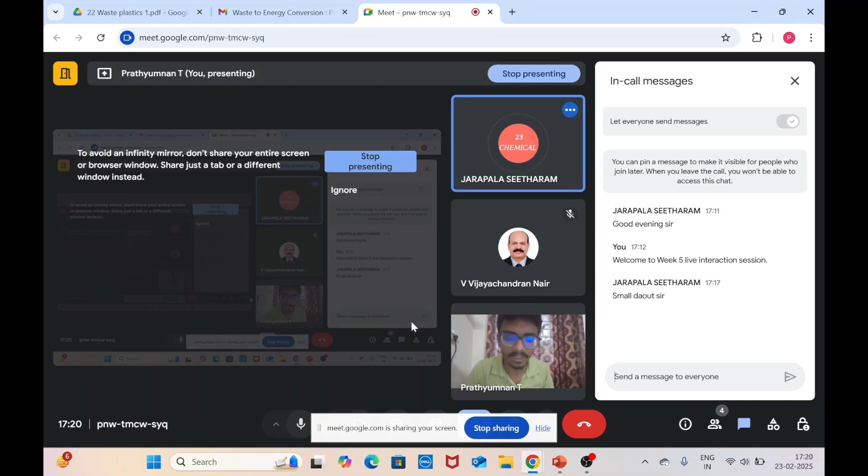I was asking about the different types of losses, or sorry, how do you define the thermal efficiency of a power plant, or what is the expression for the thermal efficiency?

Yeah, so basically, as such, if you see efficiency, it is something like output by input. So here, since we deal with thermal efficiency, we talk about the work as well as the heat input. So yeah, that's correct.

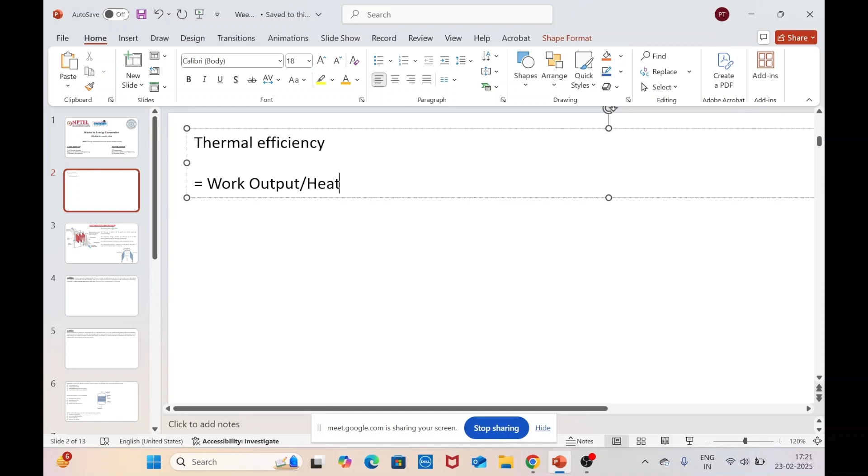If you want to elaborate this expression, it can be written as energy generation rate times T. This is how it is defined in the course module, so I'm going to follow it exactly the same: energy generation times T, by mass, times C, that is your heat capacity, specific heat capacity, the entire times 100.

So this is about the thermal efficiency, and if you talk about the overall efficiency of the process, then you have to incorporate the efficiency of every single component in the system, that is your boiler efficiency, turbine efficiency, generator efficiency, work efficiency, and all the stuff. So here is what comes.

Since the entire process of the power plant has multiple steps, each step will incur some sort of losses. So let us list down all the losses, because they form a major portion of module 2, relating to the efficiency of the power plant. So, different types of losses.

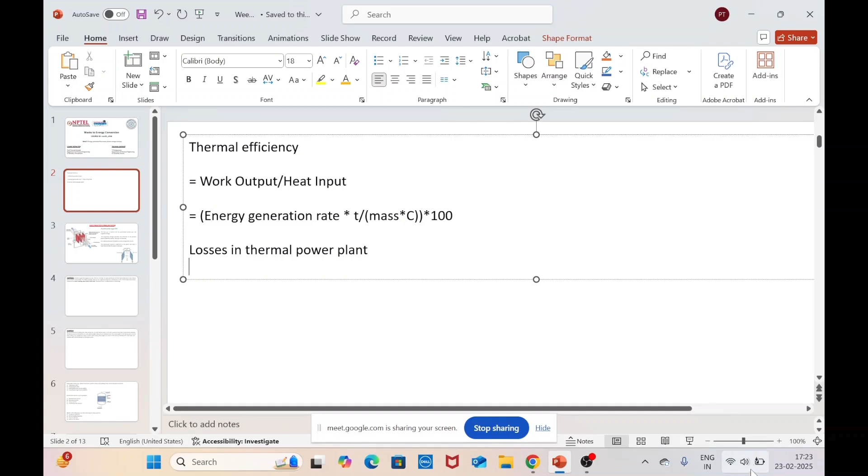Yes, you are unable to see my screen. Okay, just—

Yeah, yeah, you can see that losses in the thermal power plant, right? That heading.

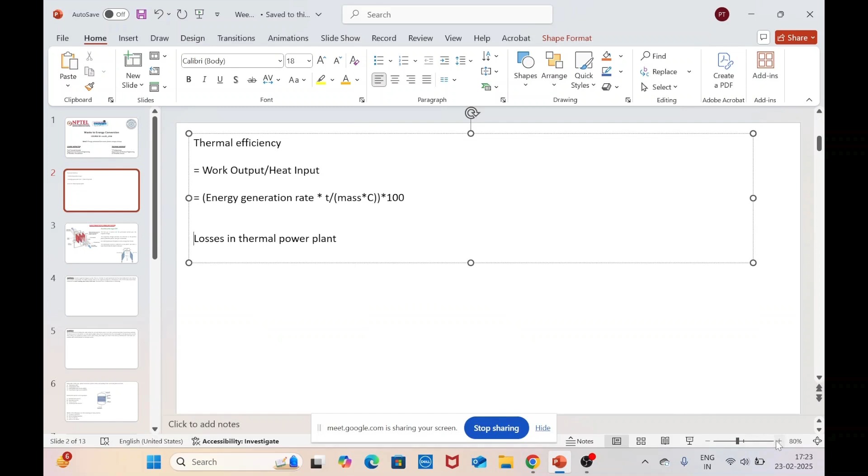Is it okay right now? Okay, so that's fine. Again, as I said, the weather is not so good, so probably there might be some internet issues.

So, losses in the thermal power plant. Can anyone list what kind of losses in thermal power plants—I mean, what kind of losses do you expect while calculating the efficiency as such in a power plant?

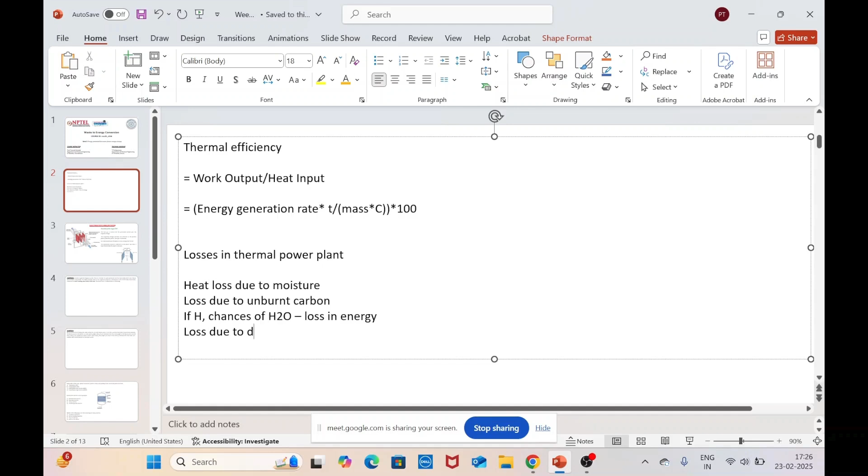Then loss due to dry exhaust gas. Another one is the loss due to incomplete combustion. What happens is, if enough oxygen is not supplied, carbon will not get converted to carbon dioxide, but rather to carbon monoxide. That is an incomplete combustion process, because of which there might be some losses happening within the system.

And another most common loss that happens is the energy loss due to convection and radiation.

After that, due to the presence of the formation of slag or ash, they will try to take up the amount of heat. This is a common problem within boilers, not just industrial boilers but even at home. The slag, or thick layer that forms at the bottom of these boilers, will prevent heating efficiency, so the system will not heat up properly because of this slag formation—they act like a heat insulator and decrease the efficiency of the process.

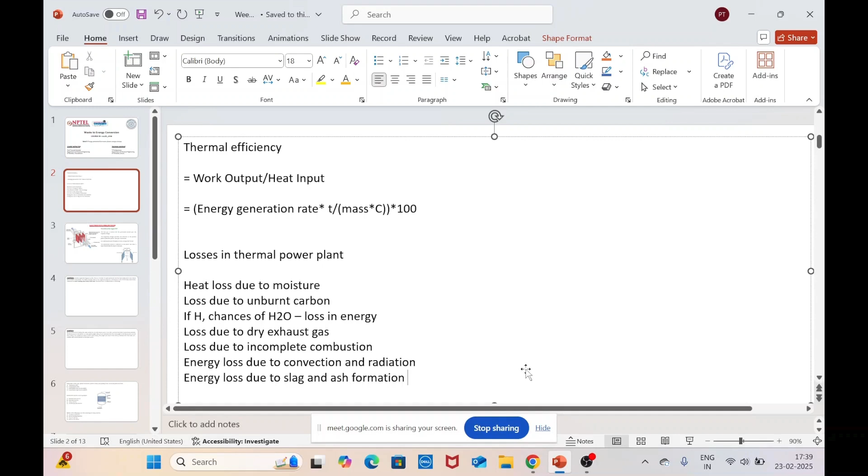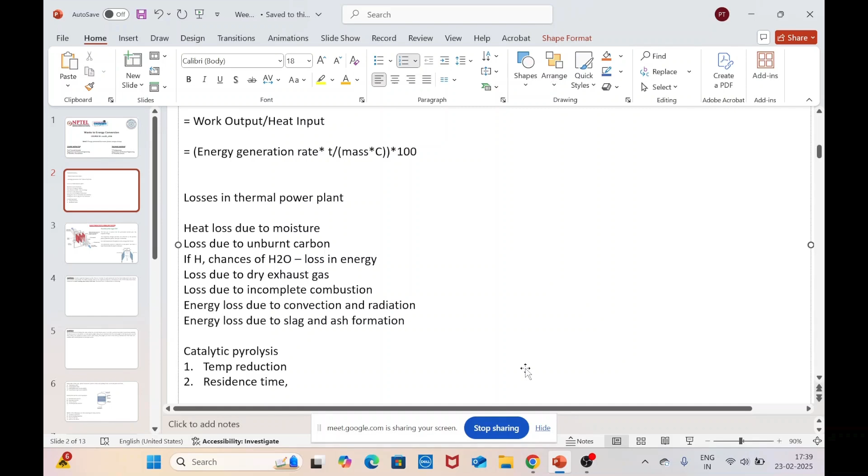Let me write it down. First one is temperature reduction. Second one is residence time, or in a layman sense, the amount of time required for conversion of waste to fuel. Then the yield. Then the quality gets improved - the liquid fuel quality will be improved if you use this catalytic process. Yes, all are right.

If you use catalytic pyrolysis, you use a catalyst, which will tend to decrease the temperature. Instead of this process happening at 1000, 1200, or 1400 degrees Celsius, using the catalyst you can reduce the temperature to 800 or 900 degrees Celsius. So the catalyst helps in temperature reduction. This is beneficial because reaching that higher temperature requires a lot of input fuel. By using a catalyst, you significantly reduce the amount of fuel invested in the conversion process. Residence time is lowered, yield is good - better quality product, and more product obtained at the end.

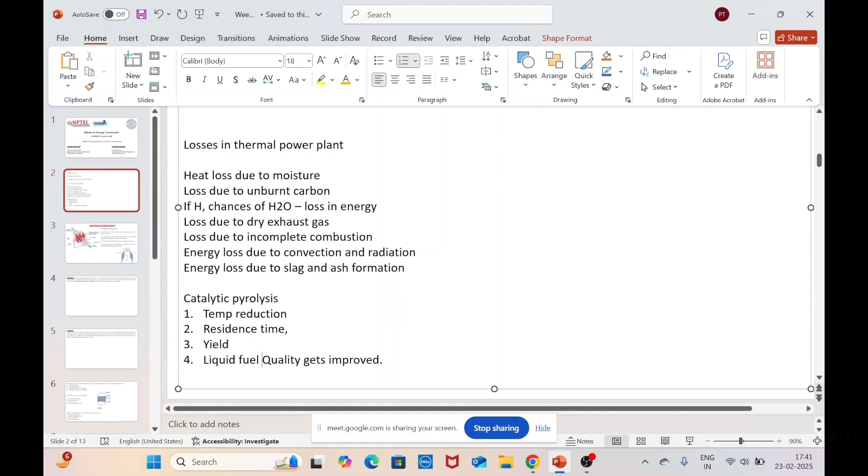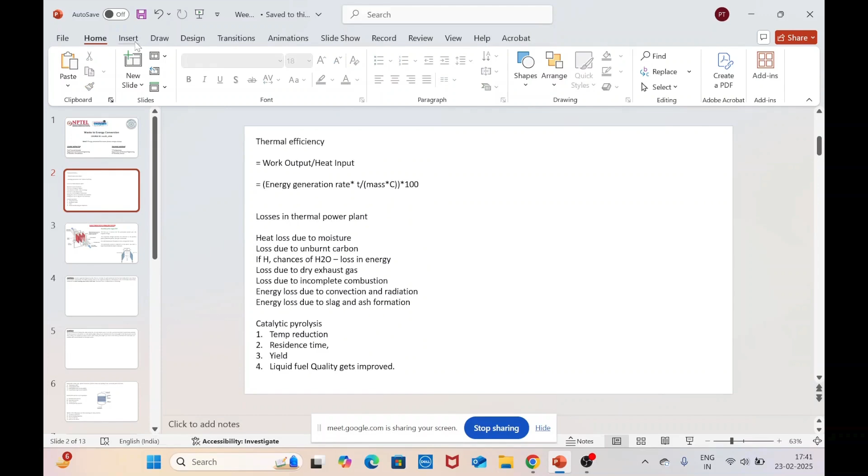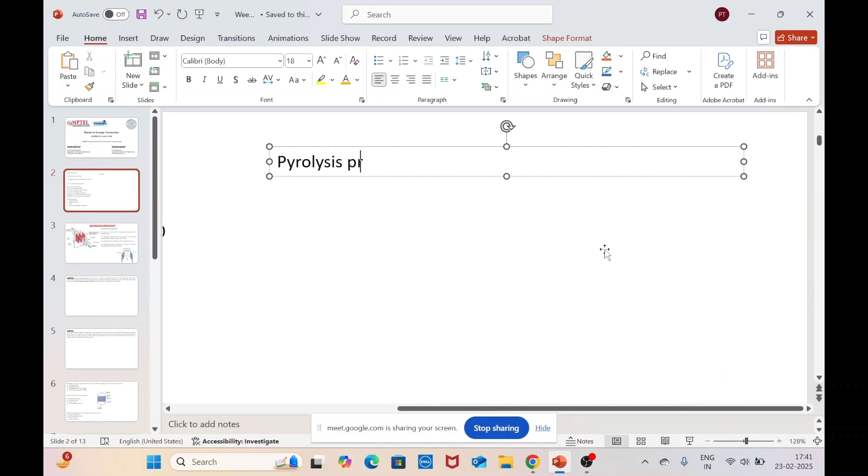So this pyrolysis process depends upon quite a few parameters. Catalytic pyrolysis process depends on multiple factors. Instead of me telling you, I'd like to get responses from you. What parameters do you think can affect this pyrolysis process?

This is like an exercise, because when you talk about a particular process, we should have knowledge on what kind of parameters could affect the process. We should try to develop this understanding on what could affect this particular process - this will help in designing of systems.

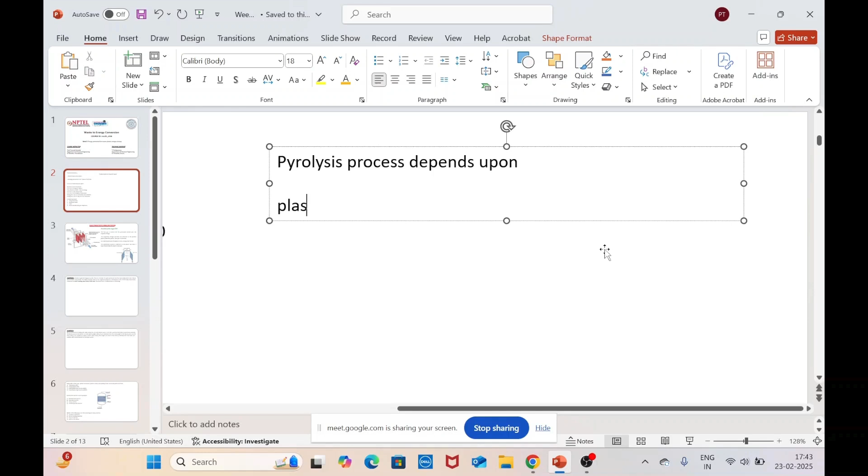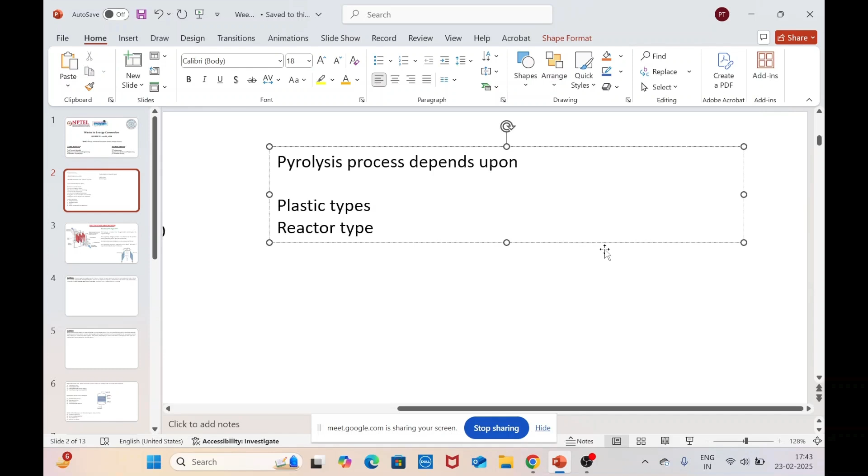Plastic type. And then reactor type - whether it's fixed bed or fluidized bed, or the screw type reactor, packed bed. Then, with respect to the catalytic pyrolysis process also - type of catalyst.

So, amount of catalyst - how much catalyst should be added. If you think from the normal pyrolysis process perspective, you can talk about temperature of the process and residence time.

So yeah, we have almost covered all the process parameters which can affect your pyrolysis process. Types of feedstock - whether the feedstock you're going to use is plastic, and if plastic, what kind? If it is biomass, what kind of biomass, and what are its constituents?

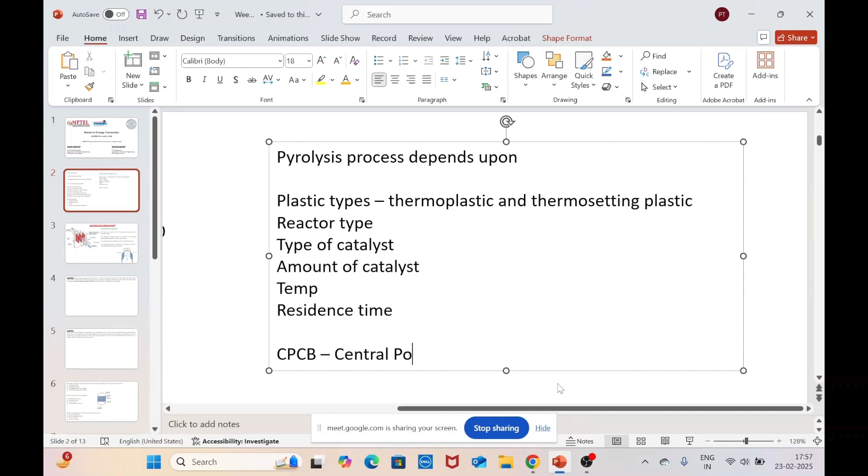Why is there a need for the gas cleanup? So to make sure that the pollutants are less. Last time also we discussed that the particulate matter in the outlet gas should be reduced. So there is a board which is called CPCB, the Central Pollution Control Board. They have some norms, particular rules and regulations.

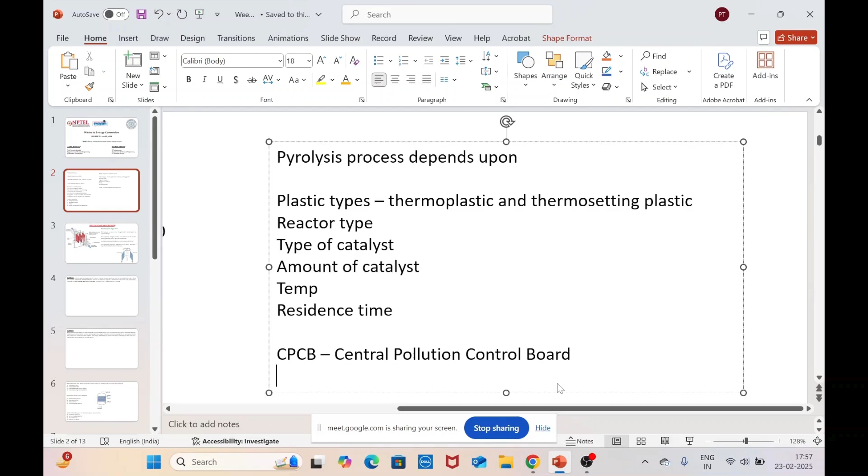So they have some norms wherein you have to remove a certain amount of the gases before you let out these gases in the atmosphere. For this purpose you require an entire system so that the flue gas is cleaned up before it is sent to the environment. So for this process we use multiple different types of equipment. One set is for particulate matter removal alone.

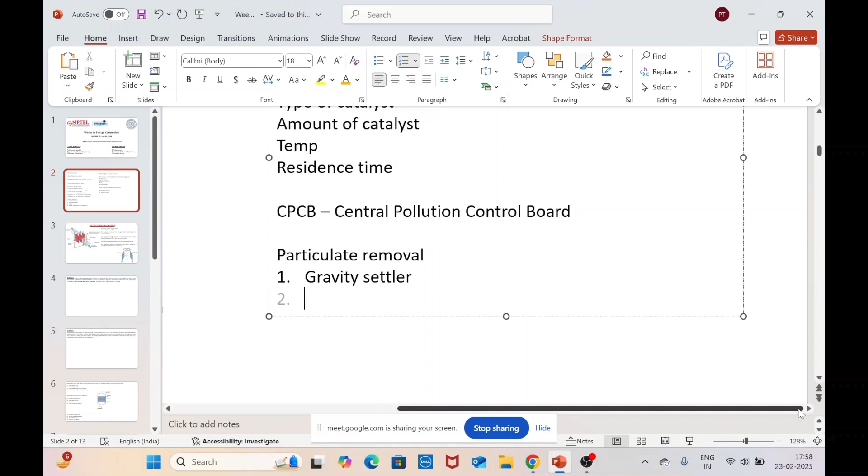You have the gravity settler, wherein you use gravity as the major source of force to make sure that the particles settle down at the bottom. One major disadvantage of the gravity settler is that it cannot separate fine particles. The particle size should be greater than 50 micrometers. However, the gravity settler is a good setup for a pre-cleaning step.

Yes, you mean power generation, steam turbine and gas turbine.

So the gravity settler is a pre-cleaning step for particulate removal, and it is one of the simplest methods you can use. Apart from that, you have ESP, electrostatic precipitator. Third, you have cyclones. The major working principle of the cyclone is that you use centrifugal force to make the particulate matter settle down at the bottom of the setup, through which you can remove it from the system.

After that you have the fabric filter. These are for particulate matter removal. Apart from that, for other gases you do scrubbing, dry scrubbing, wet scrubbing, and also adsorption-based processes. Coming to the gravity settler, you use the movement of the particulate matter in the gas to model the system. You consider the gravitational force, buoyancy force, and drag force, and by balancing this force equation you get the expression for the terminal velocity.

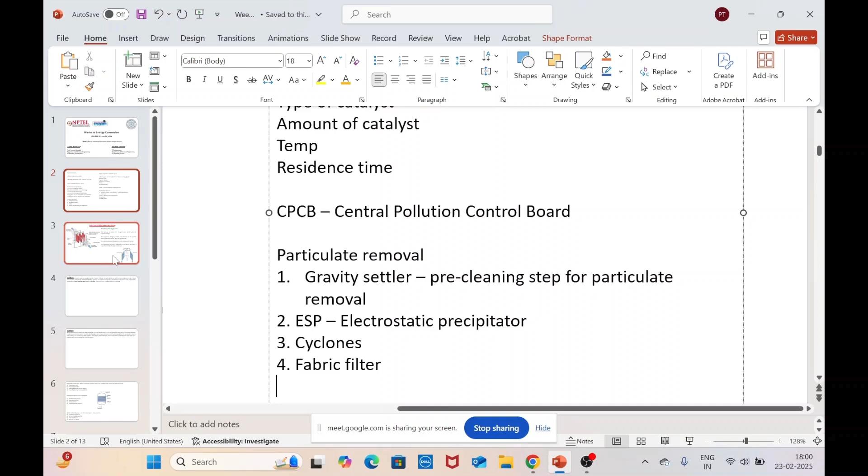The next one is electrostatic precipitators. Let me put it in presentation mode. Here we will discuss parallel plate type electrostatic precipitators. Here is a more complicated three-dimensional diagram, but if you see the bottom right, a parallel plate electrostatic precipitator consists of two plates, and in the space between the two plates you have an electrode. This electrode is connected to the negative terminal, and then the collector plates. This is the discharge electrode.

I hope my pointer is visible. So this is the discharge electrode, the one at the center, and the ones present on either side of the discharge electrode are your collection plates. You connect this discharge electrode to the negative terminal.

When the incoming gas with particulate matter enters in a direction parallel to these plates, due to the high voltage in the discharge electrode, the gas gets ionized. The particulates present in the gas get negatively charged, acquiring the charge of the discharge electrode. Since they have a negative charge and the collector plates are positively charged, they move away from the main gas stream, divert from their direction of motion, and get stuck onto the collector plates.

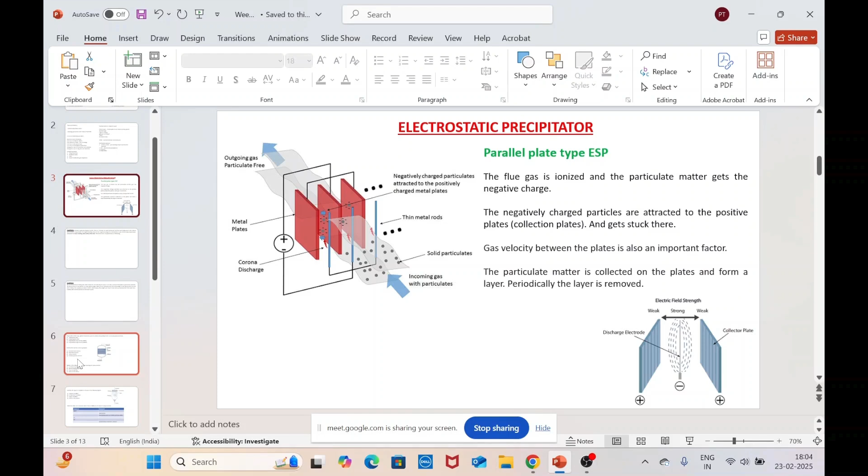So, with this, I think we have come to 1 hour of the session. So we would go towards solving some problems. That is the main focus of this session. So in case you have any doubts, you're welcome to ask me right now.

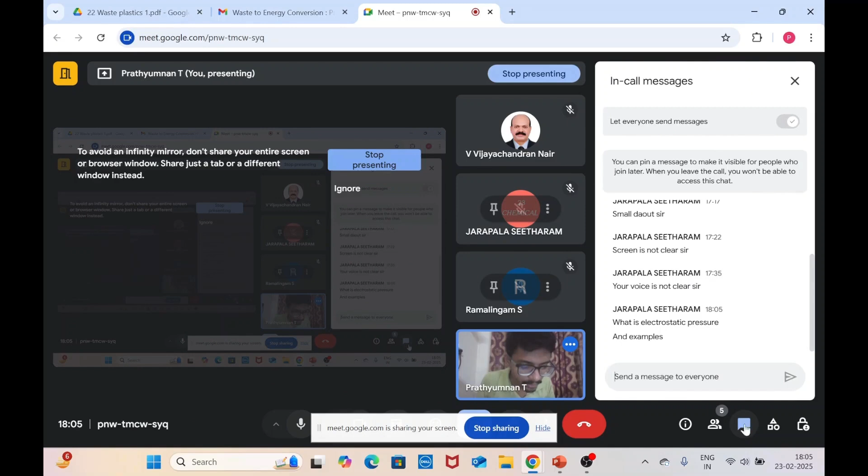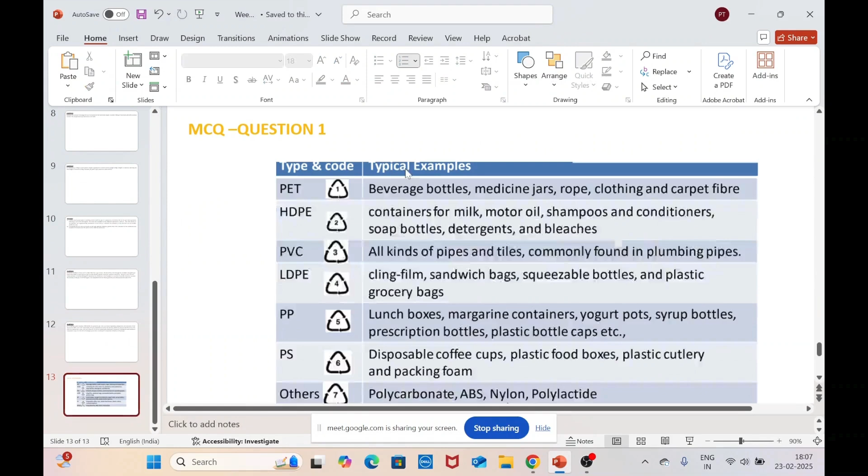I will address that question later. Because we need to know which kind of polymer is used for what. So, disposable coffee cups, plastic food boxes, plastic cutleries, and packing foams come under polystyrene. If you have carpet fiber, clothing, rope, medicine jars, or beverage bottles, they are basically PET. PET in full form is polyethylene terephthalate. Then containers for milk, motor oil, shampoos and conditioner, soap bottles, detergent and bleach come under HDPE.

The major reason why I gave this is because there are chances for this kind of question coming up in the assignment as well as the final exam. So it is good to remember one or two examples of each kind. For example, polypropylene, you have lunch boxes, margarine containers, yogurt pots, syrup bottles, and in case of LDPE, you have squeezable bottles and plastic grocery bags, and PVC, you have pipes and tiles. Pipes is the best example, so many of us will know. So these are some of the examples.

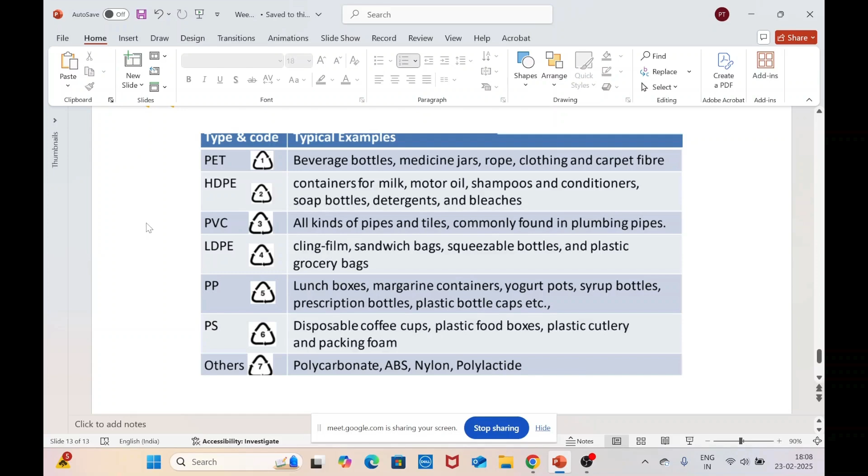Yes, the second one, CH3, CH2. CH3, single bond CH, double bond CH2. Is it okay? Again, we have one question for that, so let's come to that. So the first question is polystyrene. The second one, as somebody rightly said, it's a fixed bed reactor. So I'm just going to mark that as fixed bed.

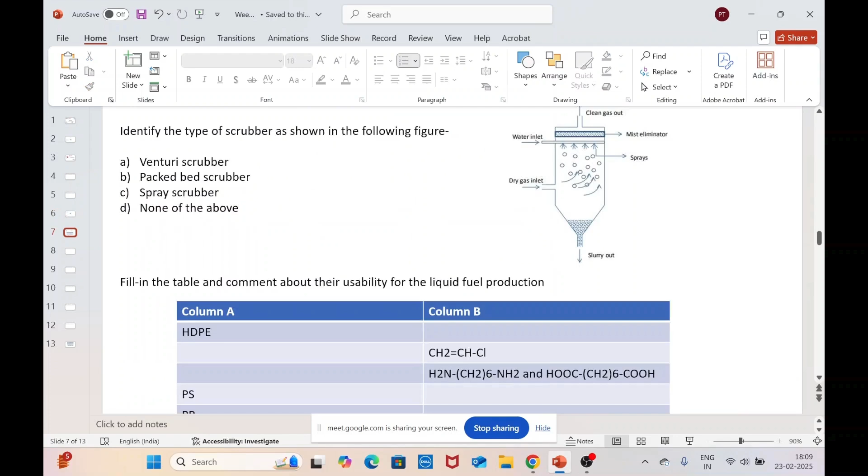Somebody was asking what a fixed bed reactor is or how it looks. I think they will be able to understand this. Then, somebody asked about this polymer, right? So let's fill up the table before we move to the previous two questions. You have to fill in the table and comment about their usability for liquid fuel production. Column A is for polymer and column B is going to be for monomer.

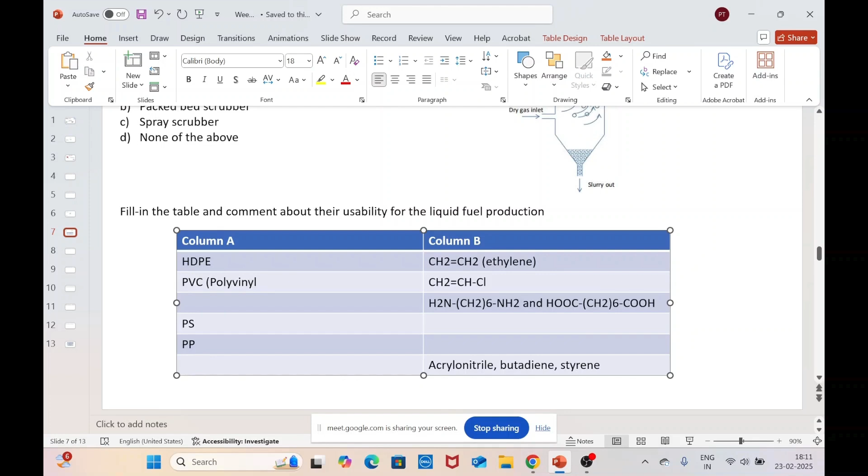So what will be the monomer for HDPE, high density polyethylene? Yeah, CH2 double bond CH2, ethylene. And the monomer is CH2 double bond CHCl, so what should be the polymer? Polyvinyl chloride. And the third one, nylon 66. This compound name is hexamethylene diamine, and this is adipic acid.

So just a very basic question, why do we call it nylon 66? Yeah, each of the monomers has six carbons in their structure. That number is 6, so that's the reason it is named nylon 66. There is something also called nylon 6. PS is polystyrene. So the monomer is styrene. C6H5. Polypropylene. Somebody said propylene. Yes.

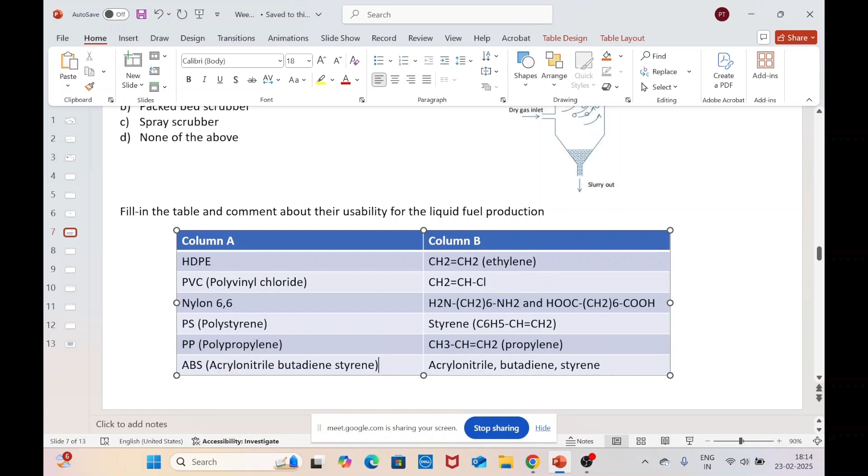So the last one, ABS, butadiene styrene. Acrylonitrile, butadiene, styrene. So yeah, yes. Yeah, it's actually a sort of a rubber. So it's a very, yes,

3D printing. So you can use PLA, polylactic acid, or you can use polyurethane also. Because when you say 3D printing, there are multiple types of 3D printing systems available. So polylactic acid and polyurethane can be used for this 3D printing purpose. Specifically for filament-based 3D printing, both of them will be suitable because they can be blended in the form of fiber wires.

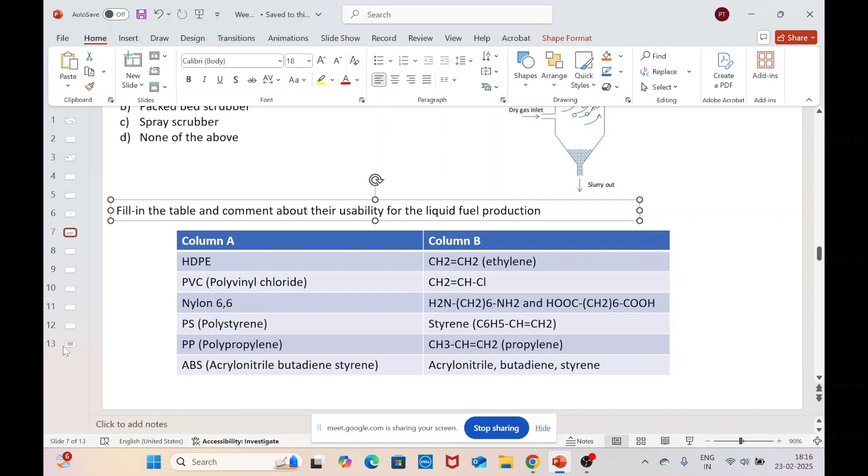So, yes. So, the basis of differentiation is based on their molecular weight, and the second one is based on their density. As the name suggests, high density polyethylene is denser, and low density polyethylene is less dense. And in case of their molecular weight, high density polyethylene has relatively more molecular weight compared to low density polyethylene. So that is the reason there is a change in the application also.

If you see low density polyethylene, you can easily come to know they are all in the form of bags. But high density polyethylene is mostly in the form of containers. So the mechanical properties of high density polyethylene are more compared to low density polyethylene. But the basis of differentiation will be their molecular weight and density. Is that okay? Yeah, containers for milk, motor oil, shampoos, conditioners, soap bottles, detergent and bleaches.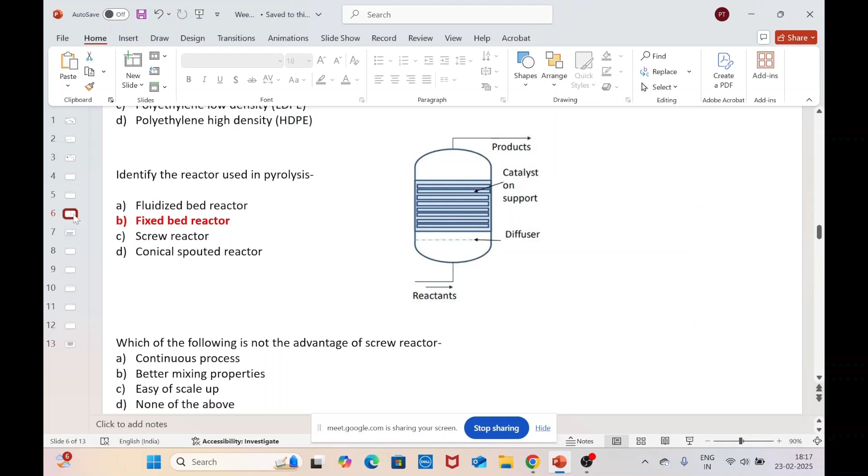And then let's come to this numerical. This is a question I was discussing previously also: how much energy will be lost? We were talking about energy losses. So you have to calculate the amount of energy lost due to the moisture in the feedstock sample. Consider the feedstock to be 100 kg and the moisture content to be 30 percent, and Tg, the outlet or exhaust temperature, is 130 degrees Celsius. Calculate the energy lost in kilojoule per kg.

I hope the equation is known to everyone, or shall I write it? Let me write the equation. Q loss due to moisture is M, your moisture content, times 4.187 times 100 minus TA, the ambient temperature, plus 2256.8, the latent heat. So this is correct, right? And then you have the specific heat of steam as 2.09 times Tg minus 100. Kilojoule per kg. TA is the ambient temperature; you can take it as 25 degrees Celsius.

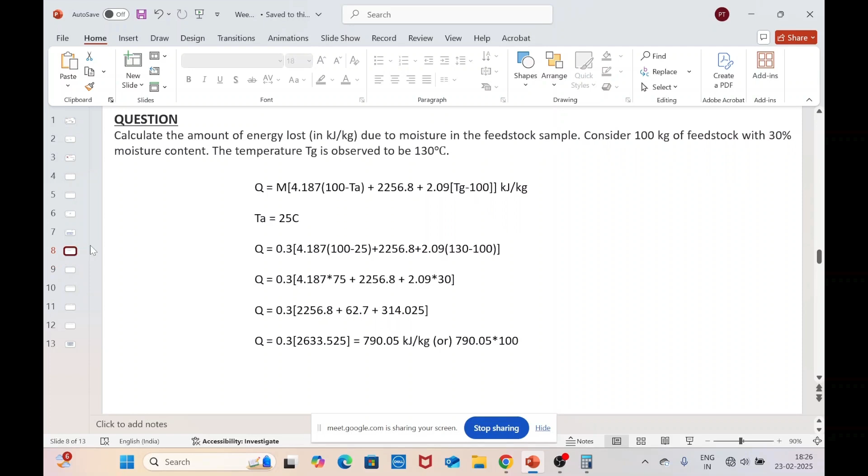So we have 2.09 times 30, 62.7. If you add all this, 790.05. If the question asked the absolute value in kilojoules, you would just multiply this with 100. But since it is asked in kilojoule per kg, the energy lost Q will be 790.05 kilojoule per kg. I guess the formula and calculations are clear. Let me wait 1 or 2 minutes in case anybody is unable to follow, then please let me know.

So I think we can go.

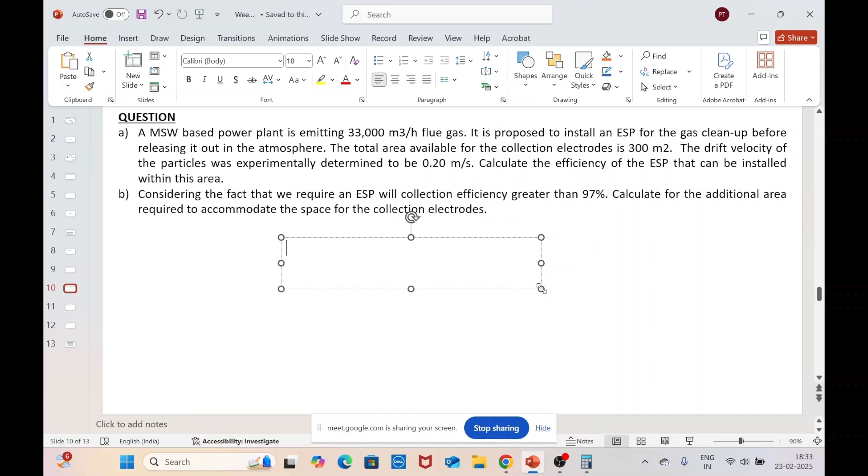So anyway, let me write this. So can anybody tell the expression for this? Is my expression right? Just take one. Yeah. So Q is the flow rate, that is 33,000 meter cube per hour. But since it is in hour and our drift velocity is in seconds, let's just convert that. 1 hour has totally 3600 seconds, so that will be 330 by 36.

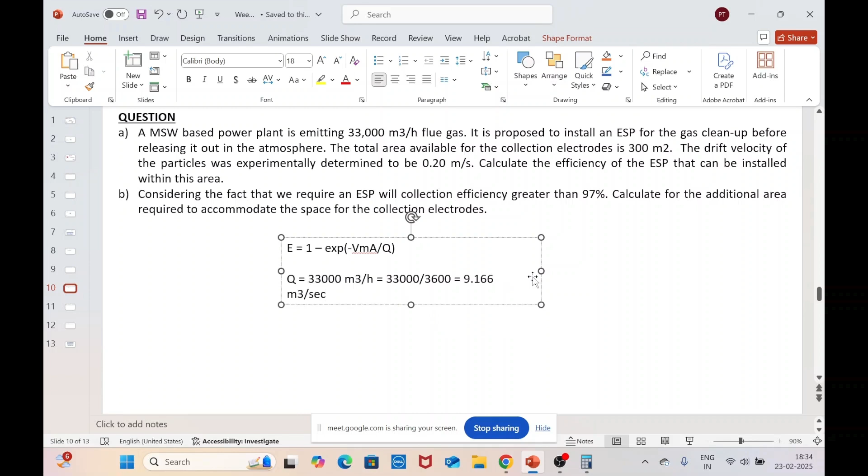So Vm is 0.20 times your area, 300. Your Q is going to be 9.167. So 300 times 0.2 will be 60, by 9.167, 6.545.

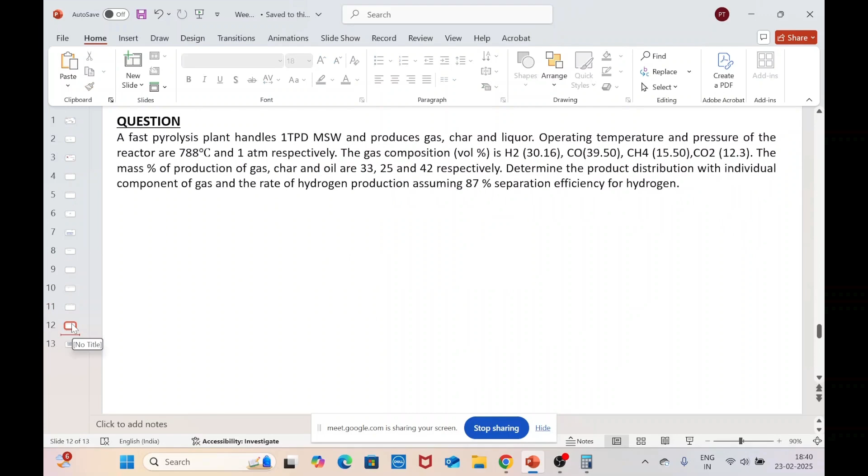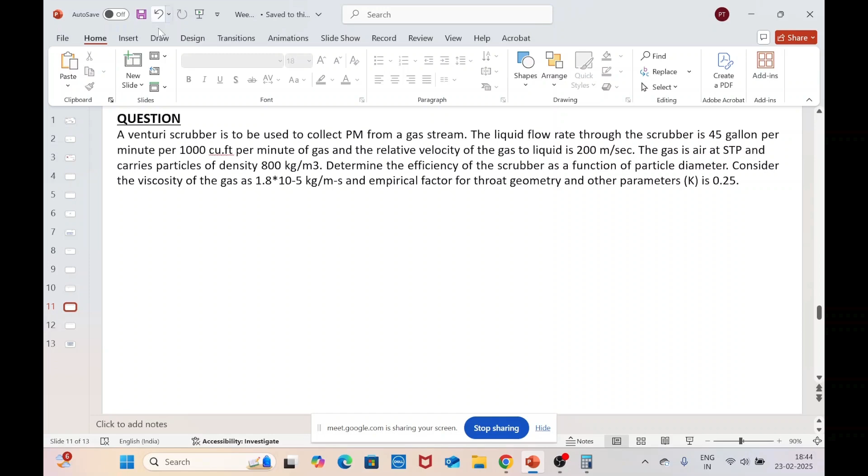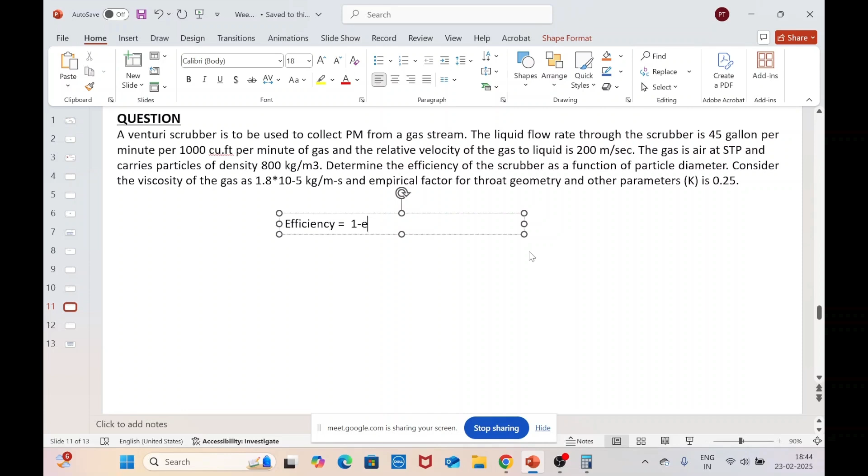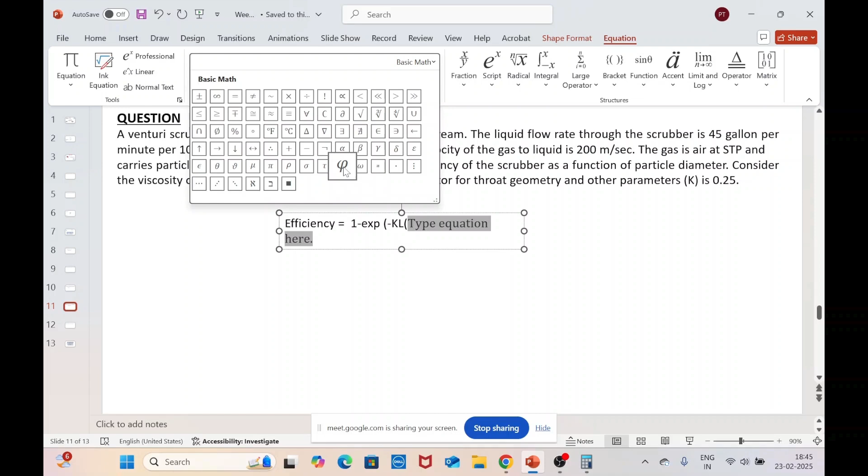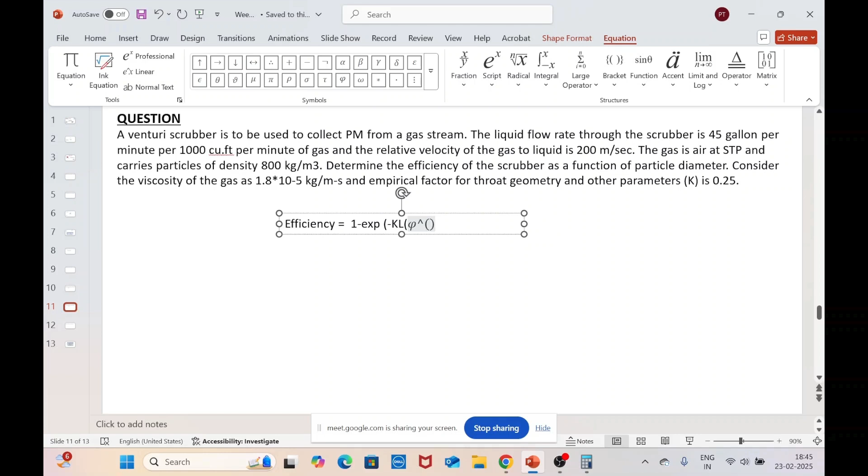and this can be written as C times density of the particle, so that we have with us, times dp square. So this dp square you are supposed to express in terms of dp, because we don't have particle diameter given to us. So let's keep it in terms of dp, times Vr, the whole divided by 18 do. So do will be the droplet diameter.

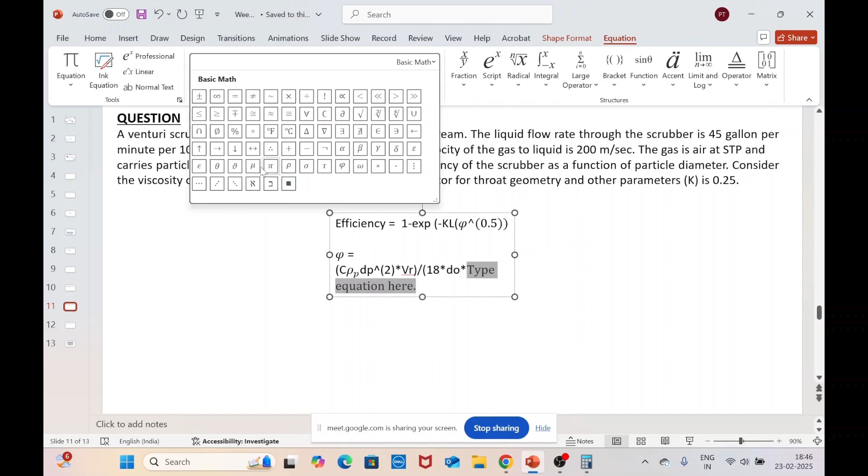Let me make it more... times your mu g. So mu g is the viscosity of the gas. So this droplet diameter can also be written using this equation, wherein the equation is 16400 by Vr plus 1.45 L whole power 1.5.

So here Vr I have already mentioned in terms of meter per second, so you don't need to convert anything here, you can just take it as meter per second and directly substitute there. So let's find the droplet diameter do. Your L is the liquid flow rate, so that will be 45.

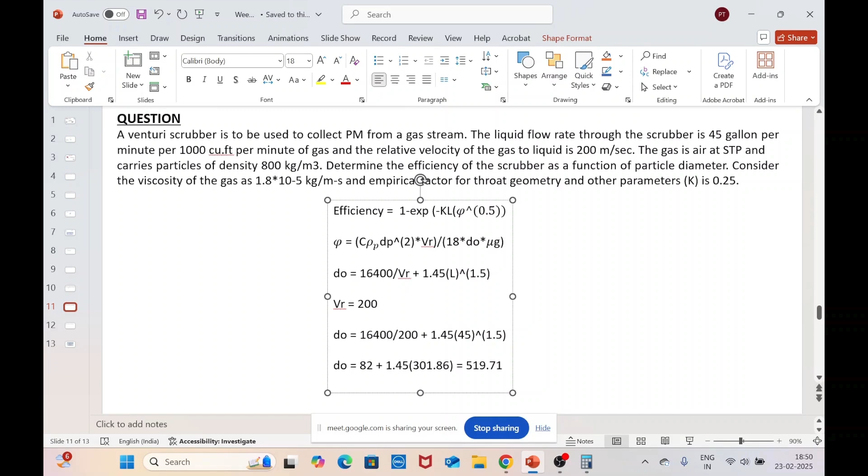So if you calculate this, it would be 164 by 2, 82. 301.86. So the value for this is 519.71, if I am not wrong. Yeah. So you have now the do, so then you need to substitute this. Do we have space? Okay.

This will be equal to C, which is a constant, you can keep it. dp, you have to express the answer in terms of dp, so that will be remaining as such. Vr, it is 200. do you have got as 519.71, times mu g. Mu g is 1.8 times 10 to the power minus 5.

So once you get the value of phi, you just need to substitute in that expression. So efficiency will be, again, since it's an equation which is going to depend upon the diameter, let me write this. K is nothing but the empirical factor for throat geometry and other parameters. So that will be 0.25 times L, which will be again 45, times your phi value, sorry, power 0.5.

So if you solve this in terms of C and dp, you will get an expression for phi, and if you substitute here, you will be getting this efficiency equation. So this is the very same model question, it's just that the values are changed. So here there will be another 800. It's just for practice purpose, so I will be leaving it here. The answer to this we will either take up in the next class, or I will post it in the PPT that I'm going to upload.

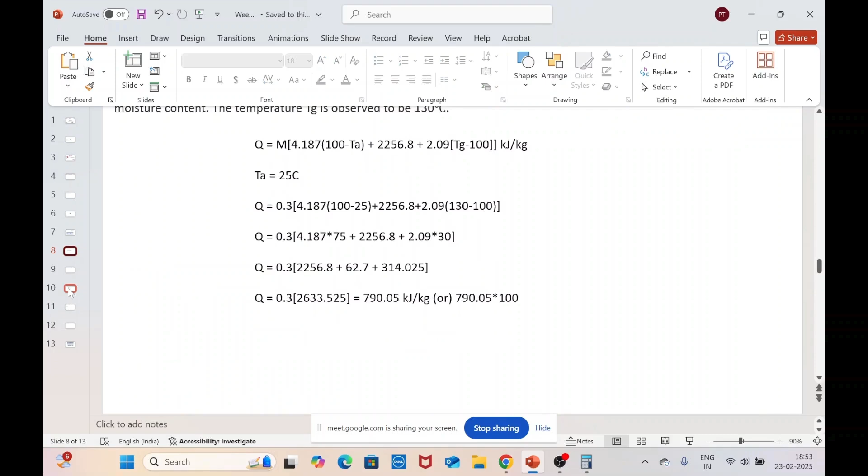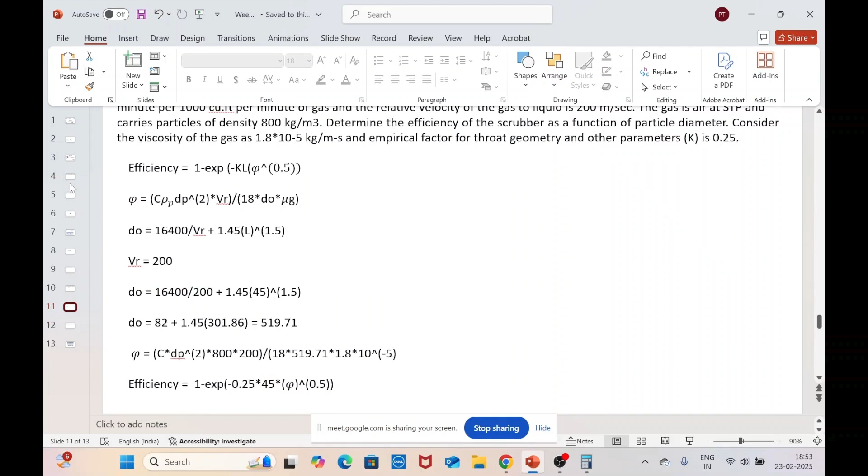So before this, I just wanted to finish one question which is pending in our basket for so long. So if you have any queries, then you can ask me, or we can go to these two questions which have been there for a very long period of time. I always wanted to solve it, but unfortunately we were unable to do it. So if you have anything, you can ask me, or we can take up this question. It's just a very simple one, and I wanted to finish this off today.

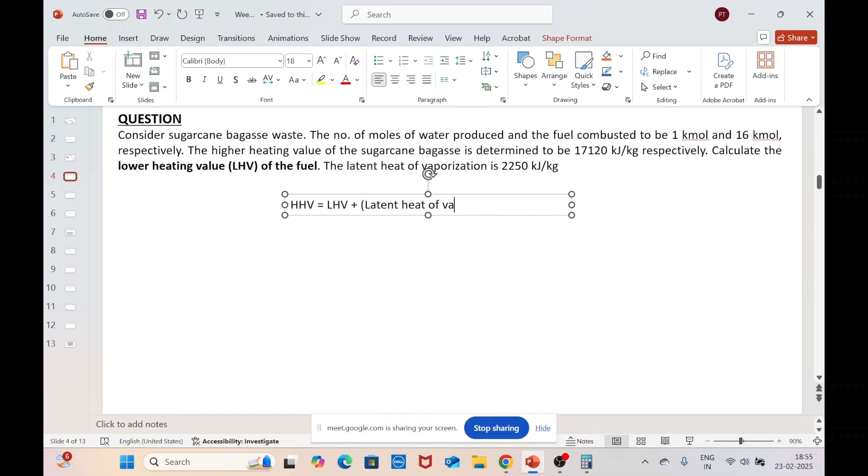And it will also be a recap for what we have learned in the week one session. At least people will be able to tell me the formula. How do you define HHV in terms of LHV plus latent heat of vaporization times the number of moles of water produced to that of number of moles of fuel combusted.

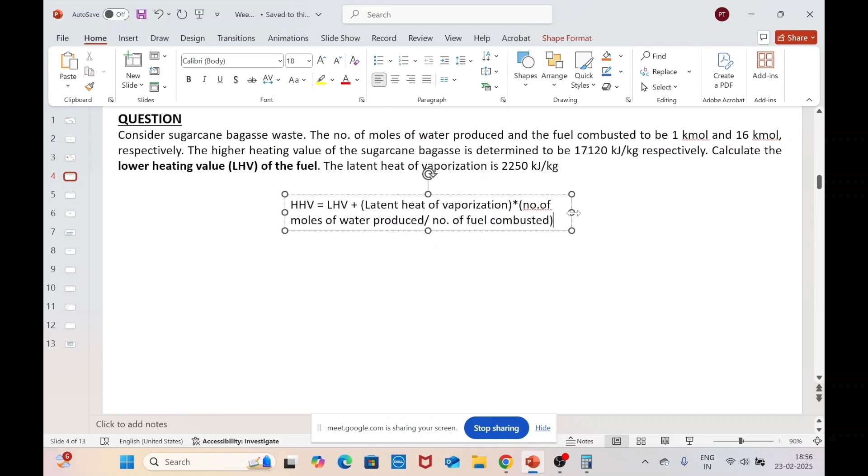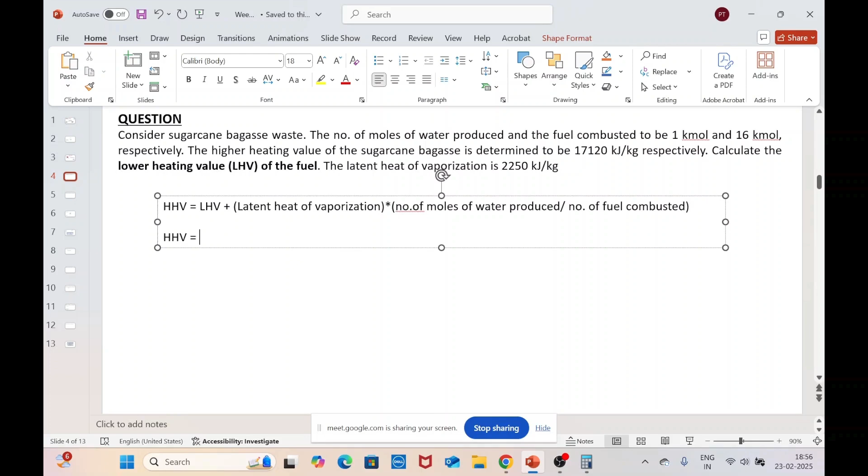So it's a very simple one. We have HHV as 17120. We need to find the lower heating value. So let me keep that as X, or let me write it as LHV plus latent heat of vaporization, which will be 2250 times number of moles of water produced, which is 1 kilomole, divided by number of moles of fuel combusted, which is 16.

So the answer is 16979.375 kilojoule per kg. So this is just a straightforward question on how to use HHV as well as LHV and the equation relating both.

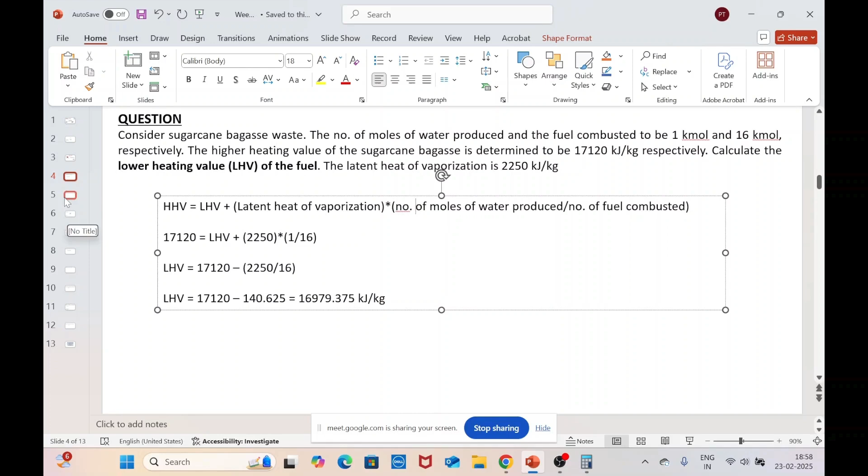This question was pending with us for a long time, and moreover it will be a kind of recap to everyone, so that's the reason I took it today. So like this we have one more question, and with that we can conclude our session for today. This is also from the previous sessions, I guess week 1 or week 2 lecture content.

We are supposed to find the solid content in 0.1 liter liquid waste. To do this, we have formulated a procedure wherein the liquid waste is transferred to a dish which weighs 300 grams. So the dish weight is 300 grams, and the total weight of the liquid waste and dish together is 600 grams. The sample is dried, and after drying the weight is found to be 433.5. Calculate the total solids and volatile solids present in the liquid waste.

Considering the fact that at 105 degrees Celsius all the water present in that liquid waste will get evaporated, we need to calculate the total solid content and the volatile solid content in the solid, based on that aspect.

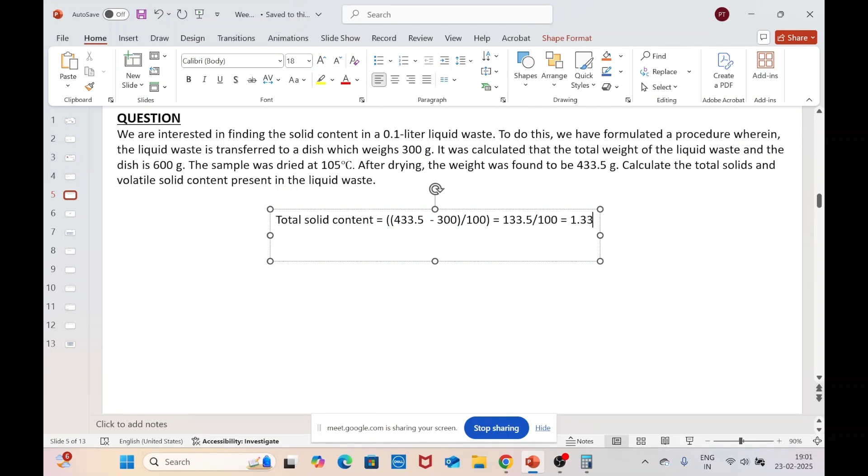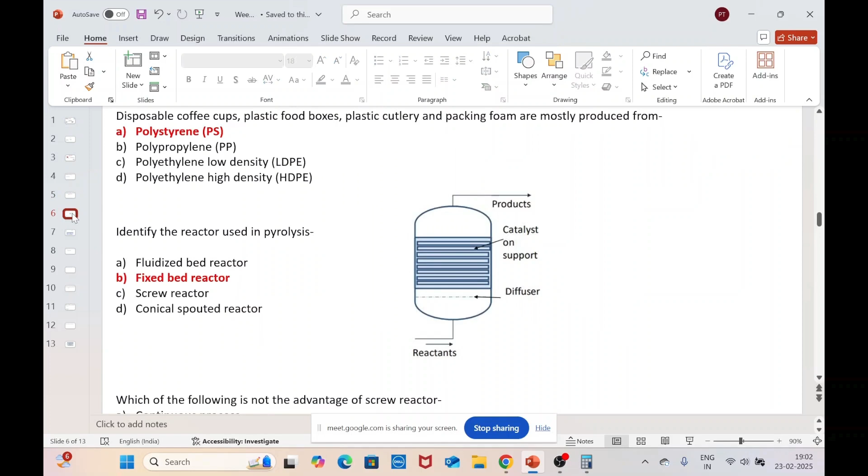So this will be the total solid content in the sample. The volatile solids will be... I think this can be calculated. So this question is there, we can take this up in the next class.

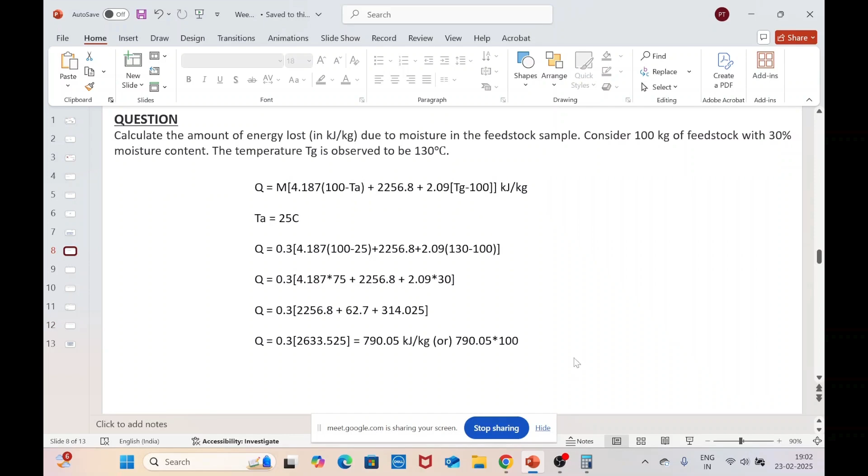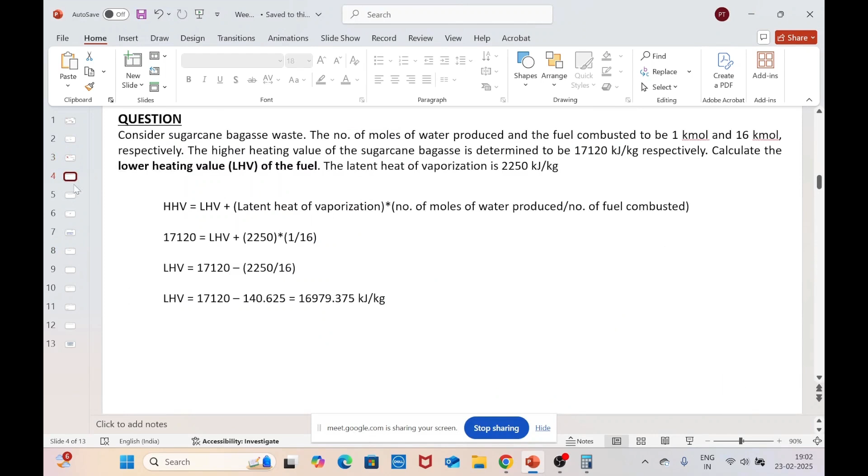I guess that's all we have for today. So any doubts with respect to what we have discussed till now? Yeah, yeah, sure.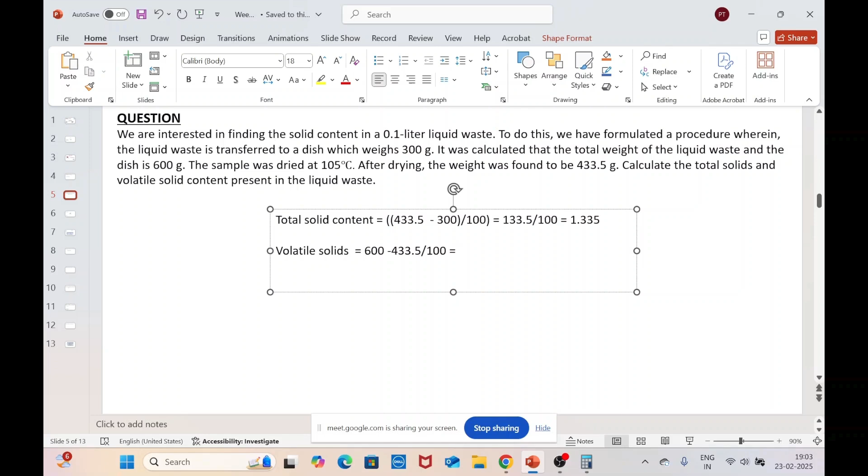I think I have made some mistake while calculating the total solids content, if I'm not wrong. No, that is fine. This one will be with the petri dish also, I mean with the dish also that we are taking. So hmm, not 600, it should be 433.5. Just a second - 600 will be the mass plus, 300 grams is the dish weight itself.

So to do this, we have formulated a procedure wherein the liquid waste is transferred to a dish which weighs 300 grams. So after drying, the weight of the entire system is going to be the weight of the dish plus weight of the sample, so that will be 133.5. Is it okay? So this should be 300 minus 133.5.

Oh yeah, fine, makes sense. So this entire calculation again will change. Was I correct in the first place or? So that is what is the volatile solid content.